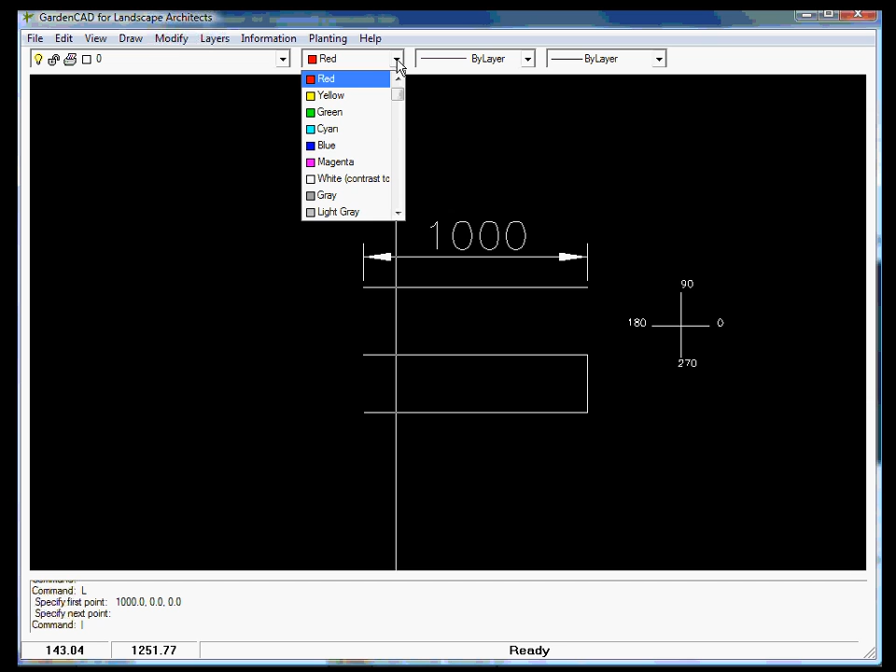I've changed the drawing colour to red, as you can see from this little dialog box up here. If I click on that down arrow, I can have any drawing colour that I want. I've changed it to red.

I'm going to start the line command again by typing L in the command area down here, and I'm going to jump to the end of that line that we first drew and move up in this direction. Now I have polar tracking on, and we'll show you how to do that in another module or another movie. Can you see it as I'm moving up?

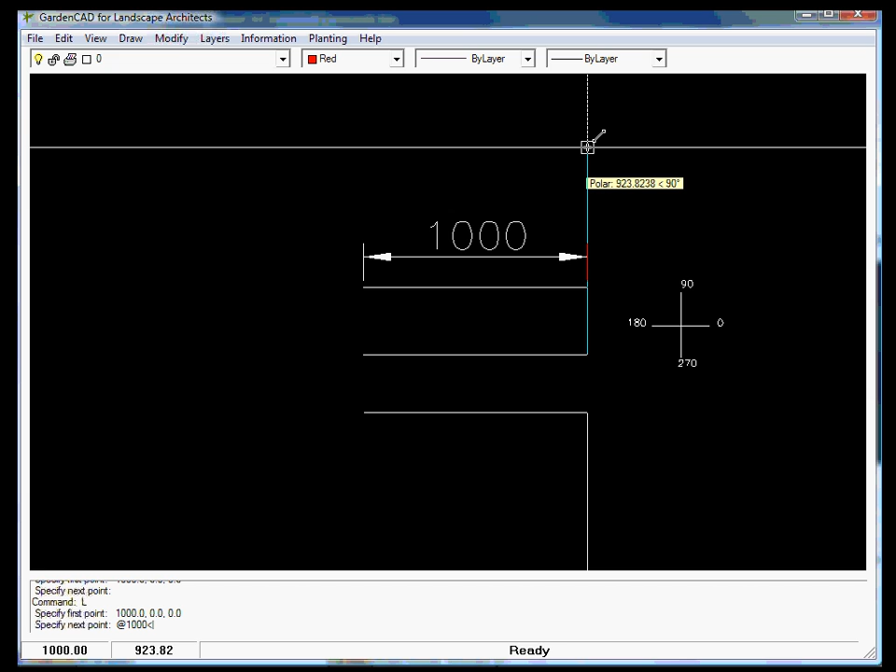The distance that I'm going, previously I typed at and gave that distance an angle. I could certainly do the same right now. I could type at 1000. If you look down in the command area, then the less than sign, so this little tracking device helps you actually type the numbers, angle of 90, and hit the enter key. We've put that little line in.

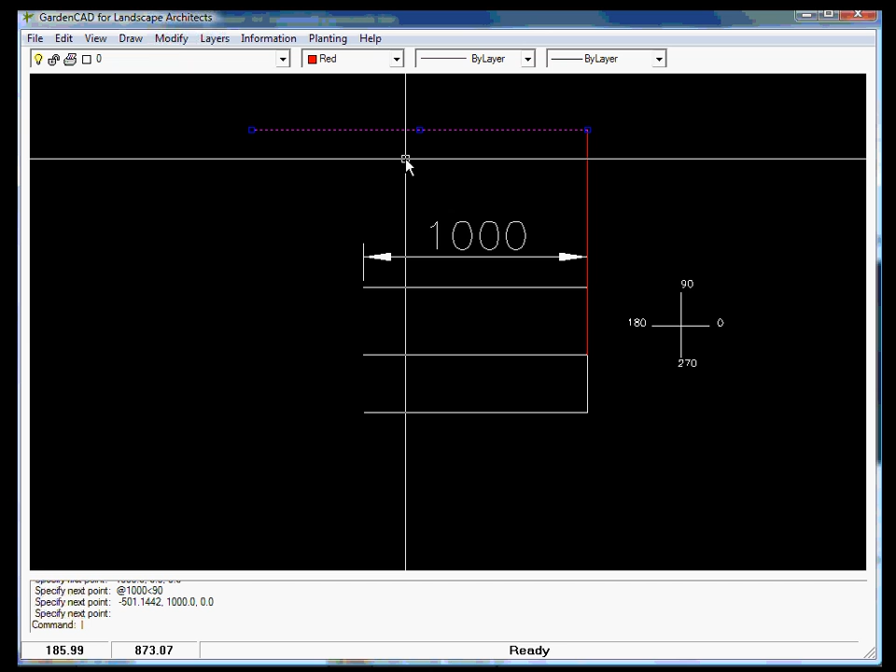But just say for the sake of argument we wanted to come back at 180 degrees, and we weren't too concerned about distance. You can see I could come across here and set approximately 1500. That's 1501, and I just need to go click. So that line there that I've just drawn is 1500 millimeters long, whereas this one is precisely 1 meter long.

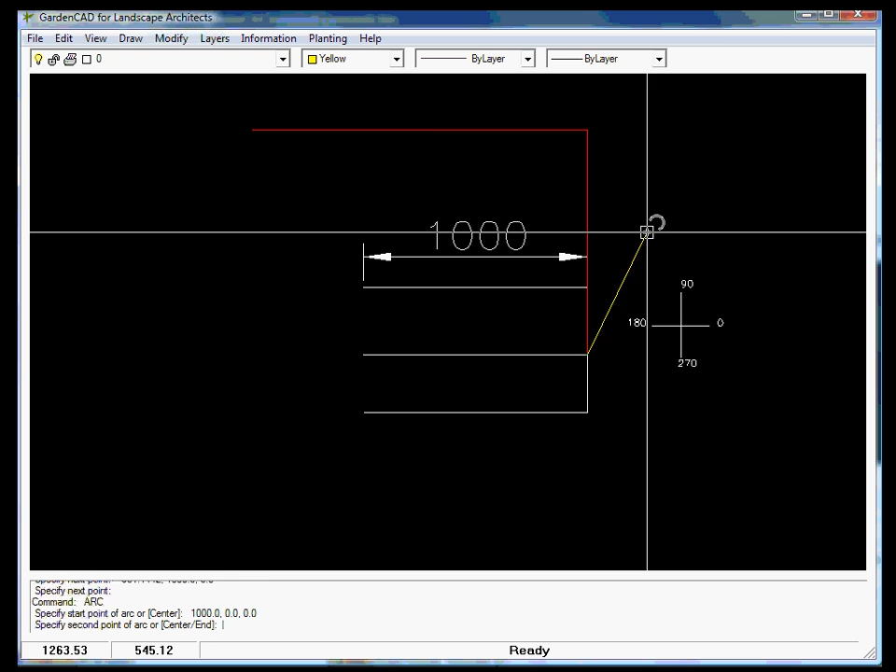I digress. I'd like to start the next command, the arc command. I'll change the drawing colour to yellow now. Pick draw and arc. Jump here. It's a 3-point arc, so I've nominated the first point on the arc. The next point on my arc should be around about here, and the other point will snap there. So I don't wish to repeat that arc, so I hit the escape key.

Now there's our line, 1 meter long, and an arc bending around here, coming back precisely 1 meter up. So we could erase that line there now, E for erase, and that line's gone. So we're starting some small design exercise there, and we've used the arc command. There are other options in the arc command, but a 3-point arc is the simplest and most straightforward.

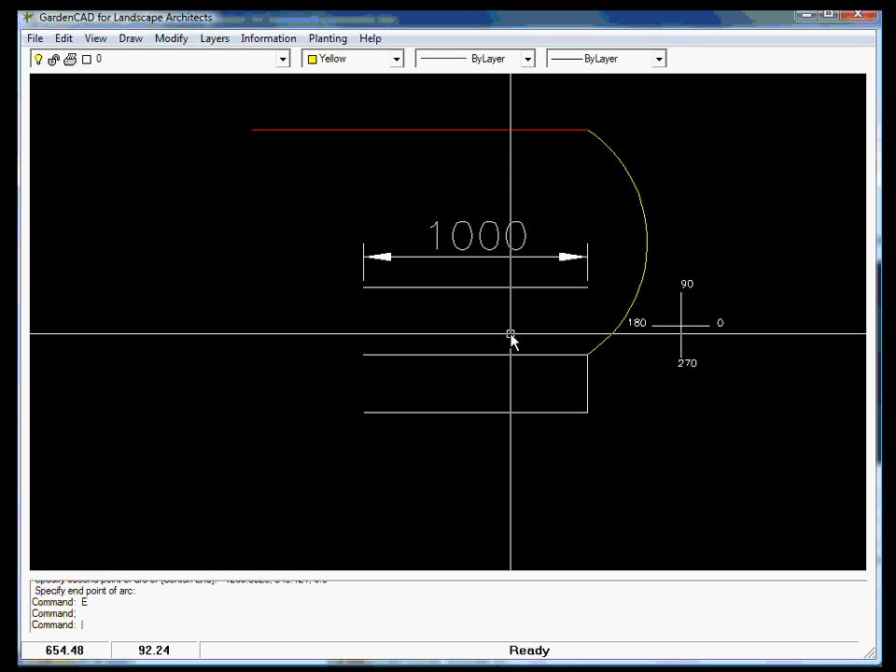You may have noticed that when we typed arc down in the command area, one of the options down here was center. If I type C for center, the prompt changes to specify center point of the arc. So I could click at the end of our very first line, which you remember was coordinate 0, 0, the origin, and that's the center point of our arc. So the center of the arc was there.

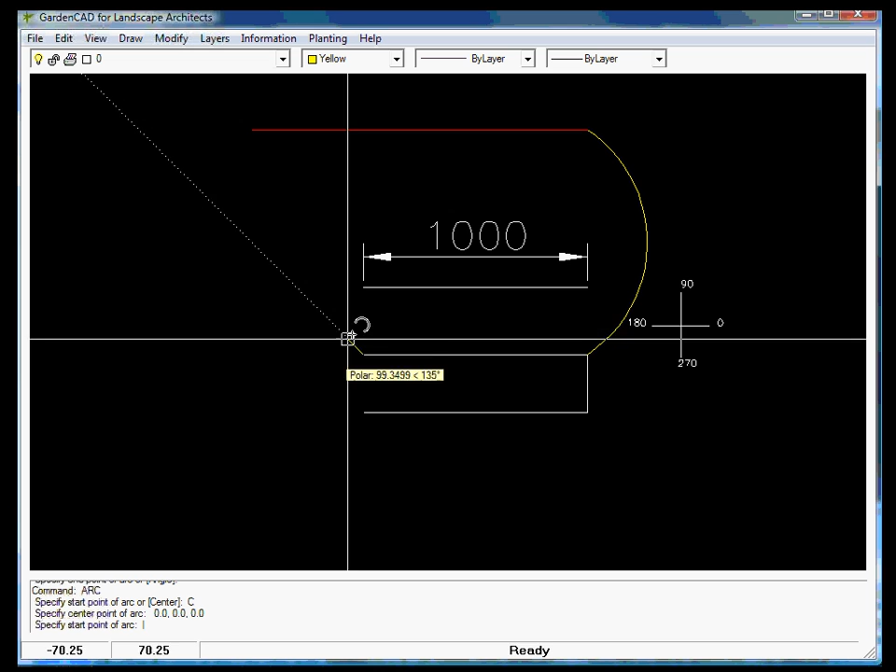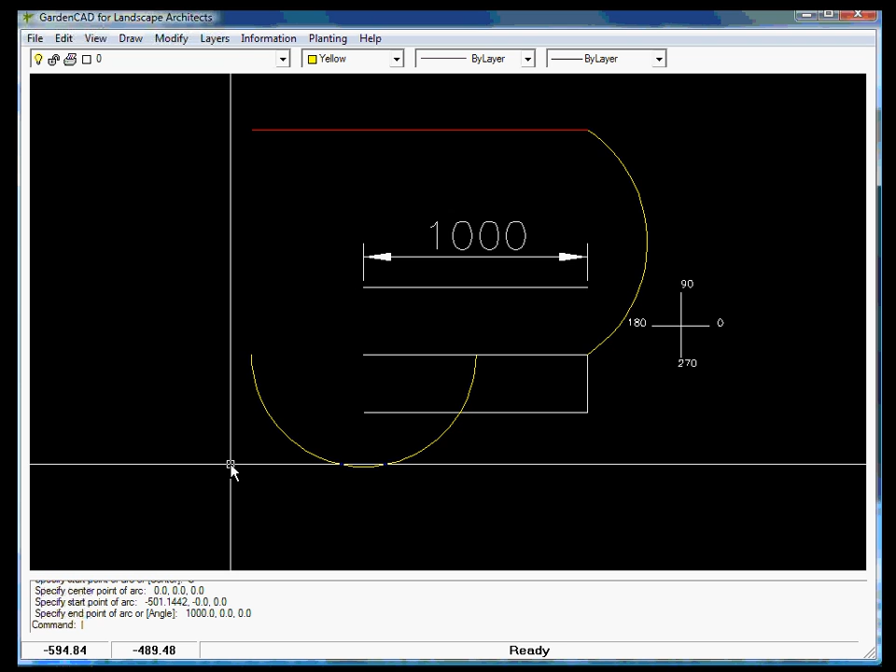We could make our start point somewhere over here, maybe roughly half a meter out here, and then we could come back over here and click down there or click in here, wherever we want, and we've put an arc now centered at the end of that line, bending around in that way. So in a little while we could trim that off, and so we're developing a rather more interesting shape. So arcs can be done with a center point and nominate the 2 end points of the arc.